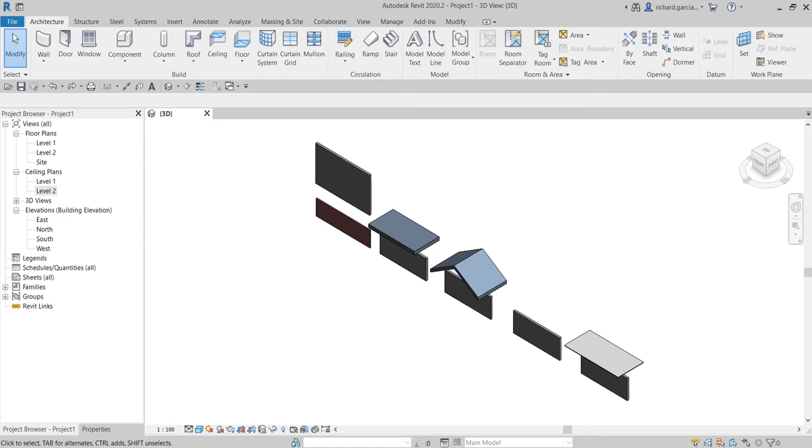Learning with Rich here. In this video, I'm going to teach you options on how to attach walls to other elements. As you can see here in my sample file, it's a very basic one. I just used the architectural template to create the project, and then I just created walls, and here I'm going to show you different options to attach your walls to another element.

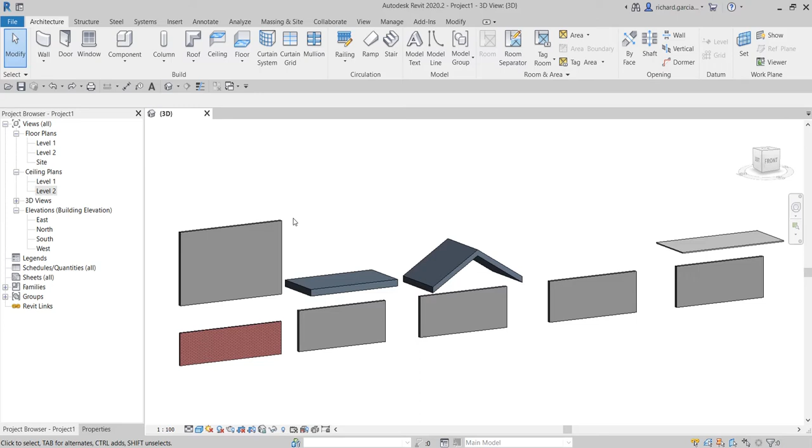In Revit, after placing a wall, you can override its initial top and base constraints by attaching its top or base to another element in the same vertical plane. We know that we can also adjust our walls by selecting them and changing the base constraint and the base offset. You can also change the top constraint and the top offset.

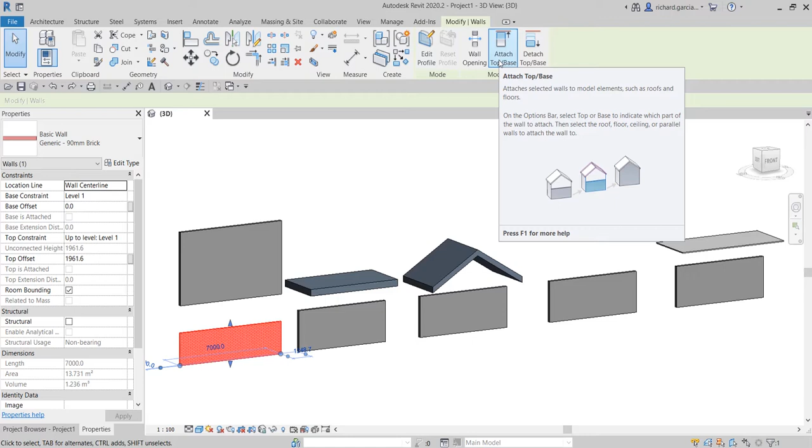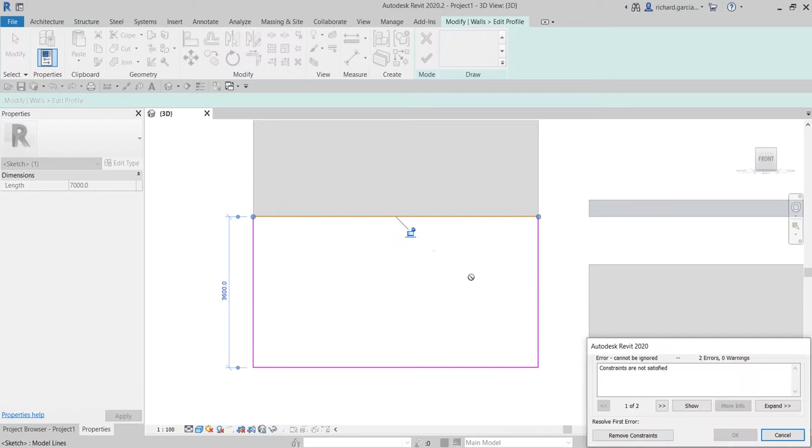But another way to attach your walls to other elements is by using this tool called Attach Top/Base. By attaching a wall to another element, you avoid the need to manually edit the wall profile when the design changes. When I say manually edit the wall profile, it's like this: I click this wall and select Edit Profile. You can do this if you want to modify your wall, for example to attach it there. Just remove the constraint and then check to finish.

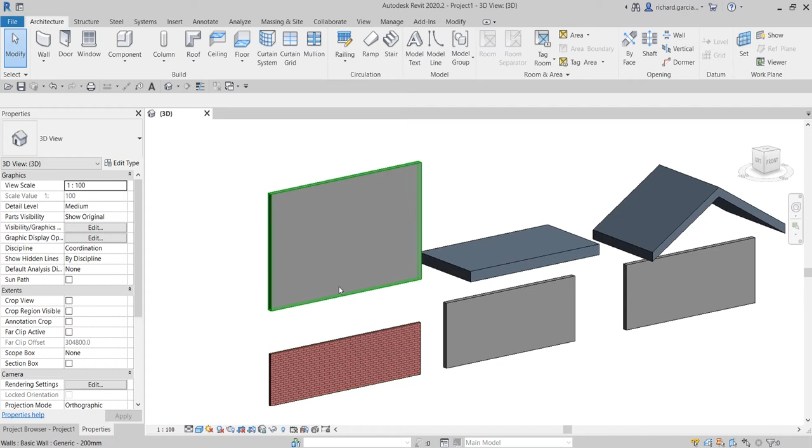But instead of doing that, I prefer using the Attach Top/Base option when attaching my walls to other elements. The other elements our wall can be attached to can be another wall that is directly above this wall. For example, I want to attach this to this wall, so you can do that. You can also use a floor. You can also use a roof.

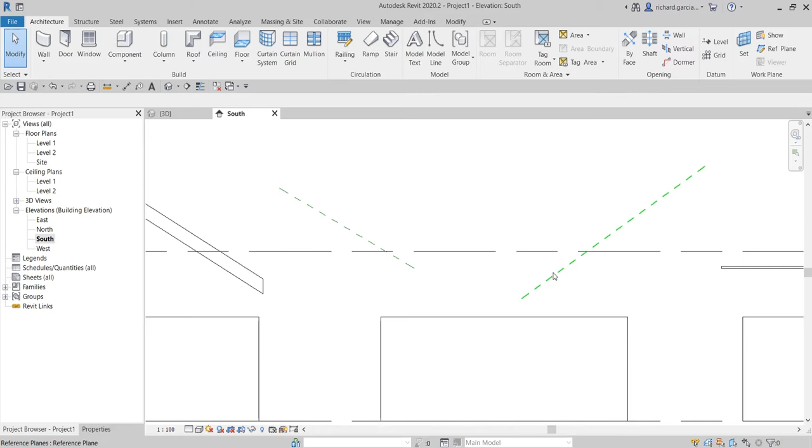And as you can see, there's nothing here, but if I go to my south elevation or any elevation, you can see that I have drawn a reference plane. You can also attach your walls to your reference plane. Or you can also attach your wall to your ceiling.

Just a recap. What are the elements that we can use to attach our walls to? First, you can use another wall that is directly above the wall that you want to attach. You can also use a floor, and you can also use a roof. You can also attach your walls to your reference plane, and you can also attach your walls to your ceiling.

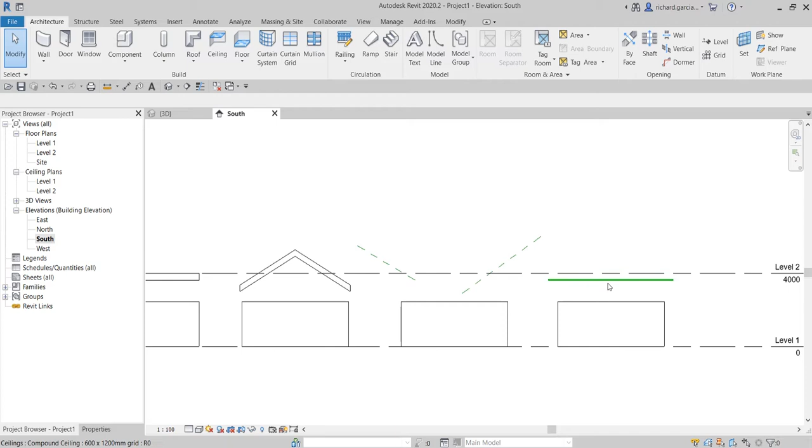All right, so let's try this one. I'm going to select these walls just to quickly show you, and then I'm going to select Attach Top/Base. I click that one, and then I'm going to click here. So there you have it, you are able to attach your wall.

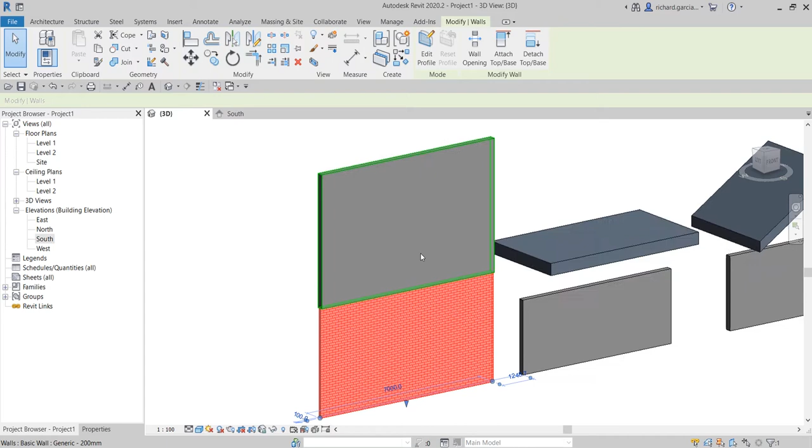What I'm going to do is split this wall. I'm going to use this tool here, Split Element. I'm going to split somewhere here, and somewhere here, and then Modify. Then I'm going to click this and stretch the top portion and then the bottom. You can see this one will also follow.

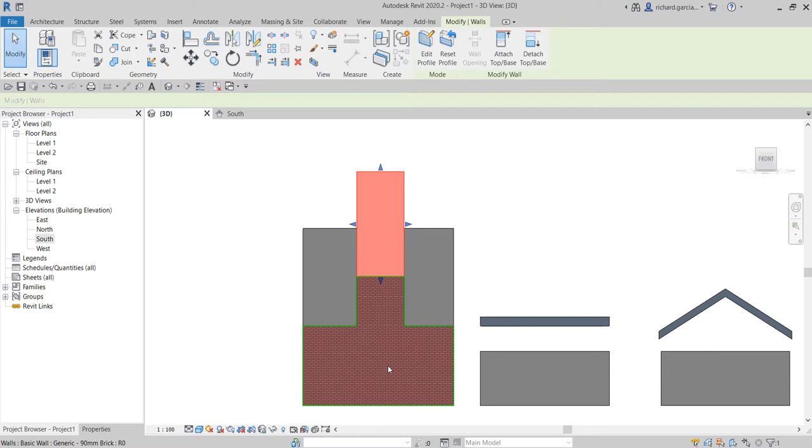I'm going to click this one. I'm going to move that, move that, and again you can see that our wall here follows. Every time I modify this one, since it is attached to that wall, it also follows, right?

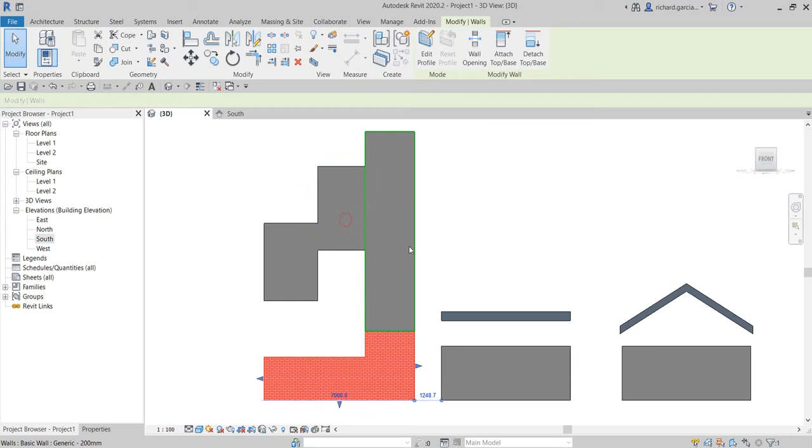Now, in case you want to detach your walls from the element you attached them to, like these walls here, all you have to do is select the wall again, and there's an option here, Detach Top/Base. I'm going to select that, and then pick this. As you can see, it will be detached. There you go.

Let me repeat. I'm just using the top portion here, but of course you can also attach to the base portion of the element. I'm going to select this, Attach Top/Base. Let's click this one, Attach Top/Base. Let's click. All right, so I think it's already attached.

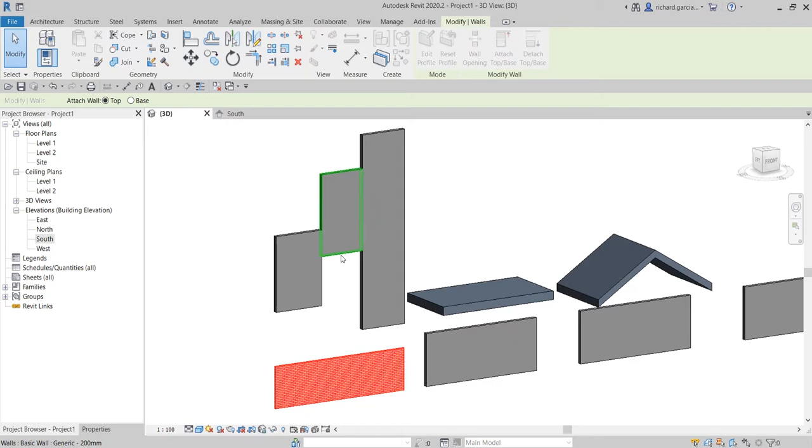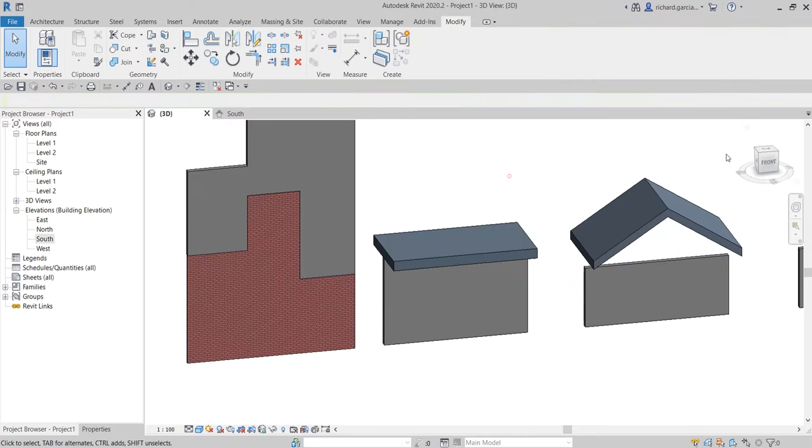Detach all. So just detach all first. So I select attach. Okay, attach. All right. There you go. Okay, so another element wherein we can attach our wall is our floor here. So I'm going to select the wall, attach top/base, and then let's select the floor here. There you go. Again, if we are going to move our floor here, the wall will follow as well, right?

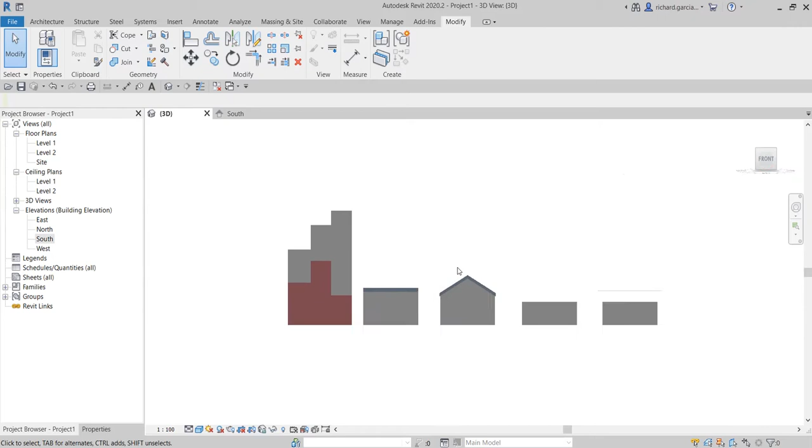Okay, and same with our roof here. So I'm going to click this, attach top/base. Let's click that one, and then let's click our roof. There you have it. So again, if I'm going to modify the roof, I'll adjust that. You will notice the wall will also follow.

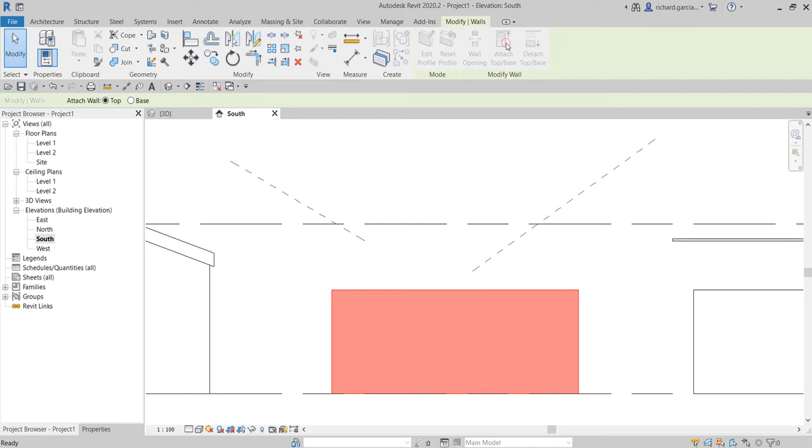Okay, and then I'm gonna go ahead and open the south elevation here, and then let me just quickly show you how to attach our wall to the reference plane, which is simple. Same procedure. You just select the wall, attach top/base, and then we can click that, and there you go. So this is infinite. Okay, so it goes all the way down there. Even if I have drawn my reference plane only up to this point, it continues to infinity.

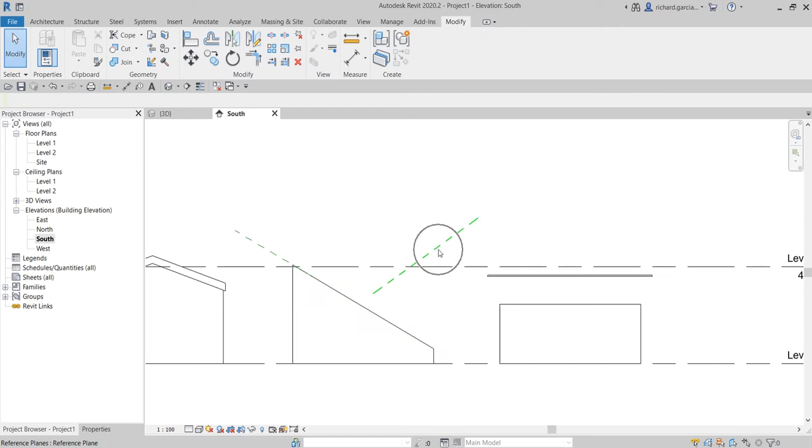All right. So if I'm gonna go ahead and attach that also here, what will happen is it will detach from your first reference plane and then it will attach here. So I select the wall, attach top/base, and then let me click this one, and that's what's going to happen. Okay, and then for the last one, we have the ceiling here.

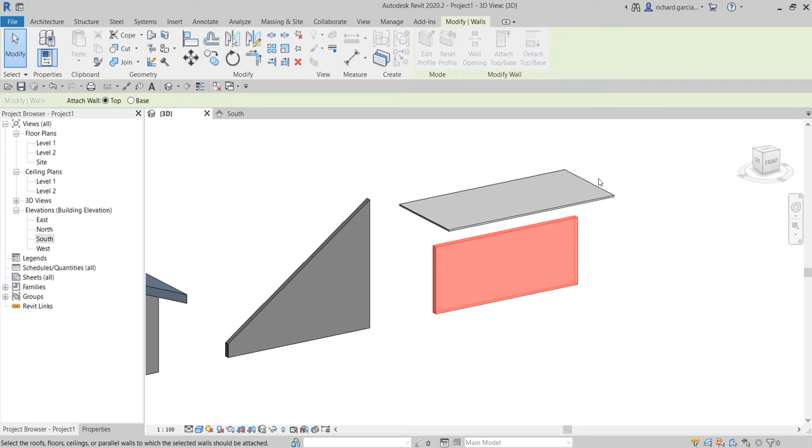So another element wherein we can attach our wall. So I select the wall, attach top/base, and then let's click the ceiling. Okay, so again, if I'm going to select the ceiling, you can adjust the ceiling and then the wall will follow as well. So if you want to modify or detach your wall from the ceiling, just click and then detach it from the ceiling, right?

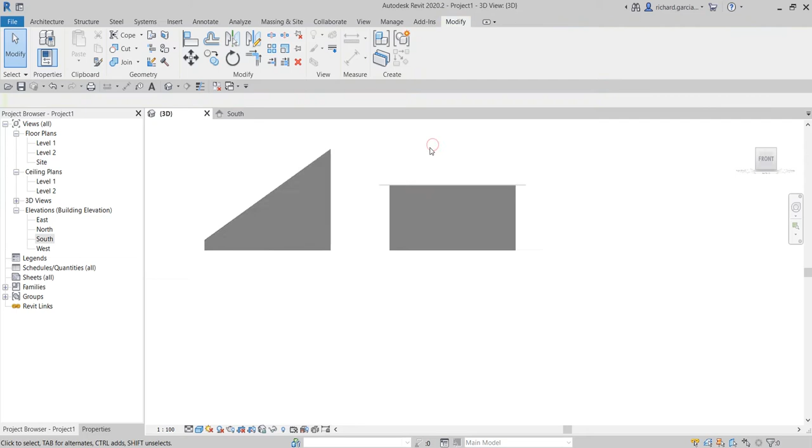Okay, so just a few guidelines when attaching walls. So first, you can attach wall tops to a non-vertical reference plane. So it should be horizontal, of course. And then you can attach walls to an in-place roof or floor. Okay, just like this one.

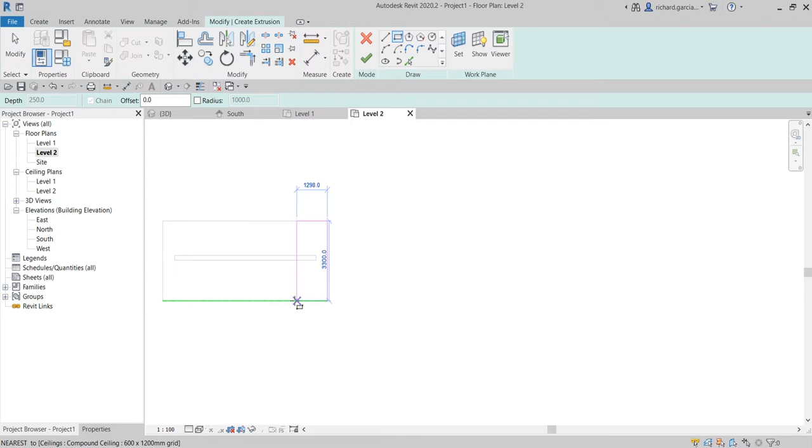I go to my level 2, and then I'm going to create here an in-place family. An in-place family that is a floor. So I select the floor. Okay, so I'll just create here an extrusion, just a rectangular one. Okay, just like this one. I'll just put it here. There you go. Just finish, finish. And then I'll just copy this wall here.

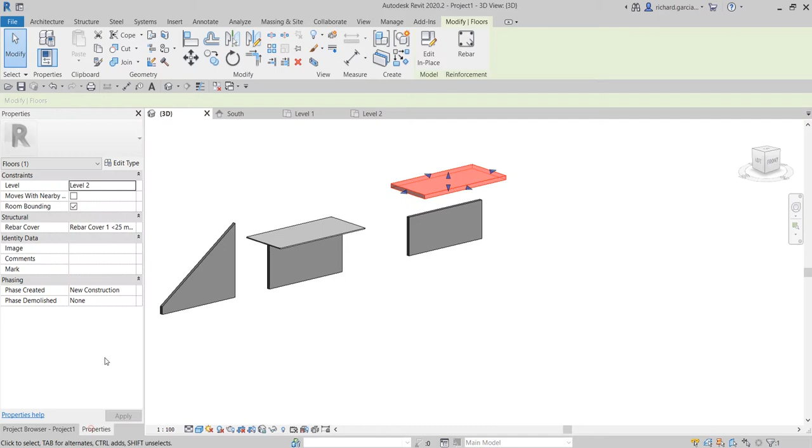Alright. So I go to the 3D view. So this is our in-place family. So if I select that one, that is an in-place family. You see there's an Edit In-Place, meaning this is an in-place family. So I select this one, the wall, and then let's attach it. So let's click. There you go. Okay, so it needs to be a floor in-place or roof in-place.

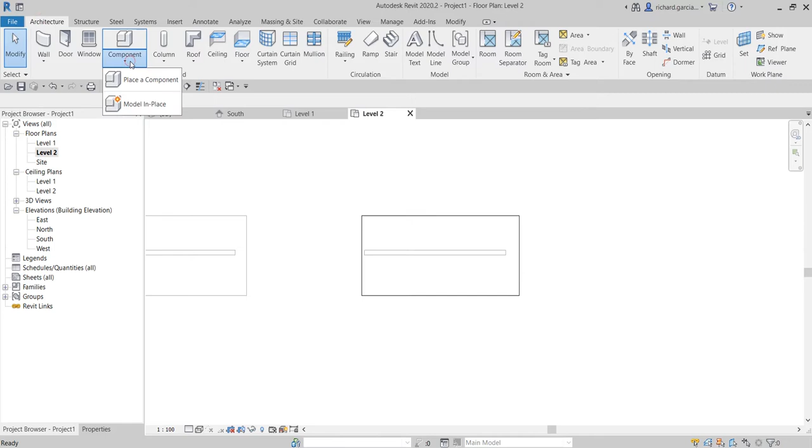So let me create a roof here. I go to Component, Model In-Place. So this time I'll create a roof category, roof. Okay, just a simple extrusion. So I create one here, just like that. Finish, finish, and then I copy the wall. Just copy that wall, put it here.

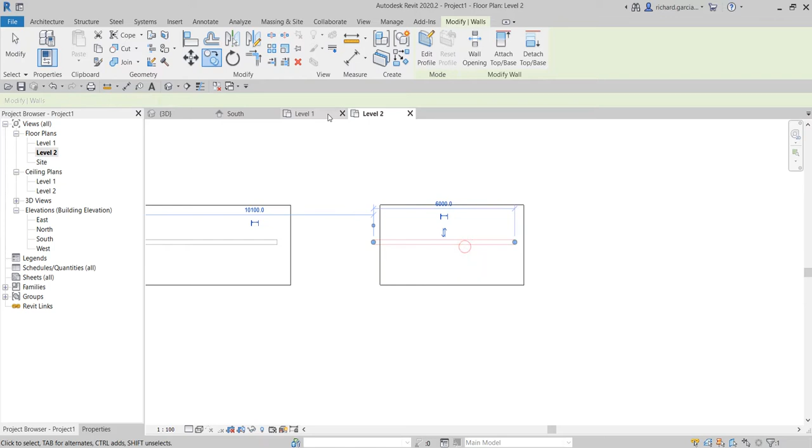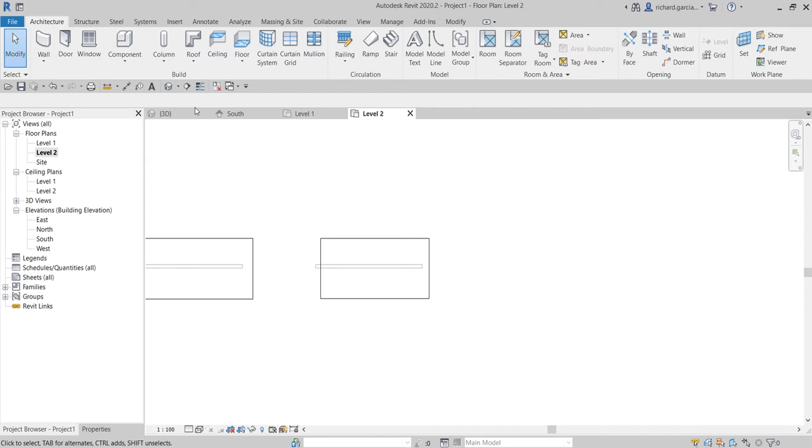Go to the 3D view just to show you. Click, attach top/base, and then attach to our roof there. Okay, there you have it. Okay, the other side didn't follow. So next, one thing that I need you to take note of as well is to make sure that you properly categorize your in-place family as a roof or floor.

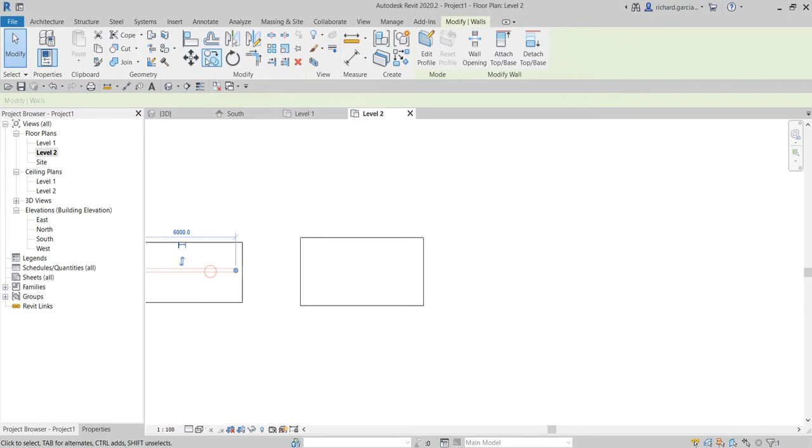Because if you are going to create, let's say, a generic model, so I select a generic model and then I select OK. I'll create an extrusion here, just like that. Check. So I select the wall, copy, put it here. So if I go to the 3D view, I attach this, select, attach top/base. As you can see, I can't select our in-place family that is a generic model. You see I can't click. So it should be a floor or roof in-place family.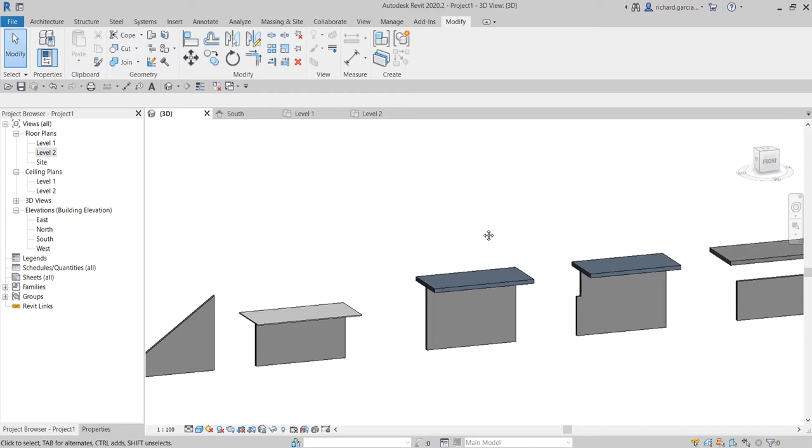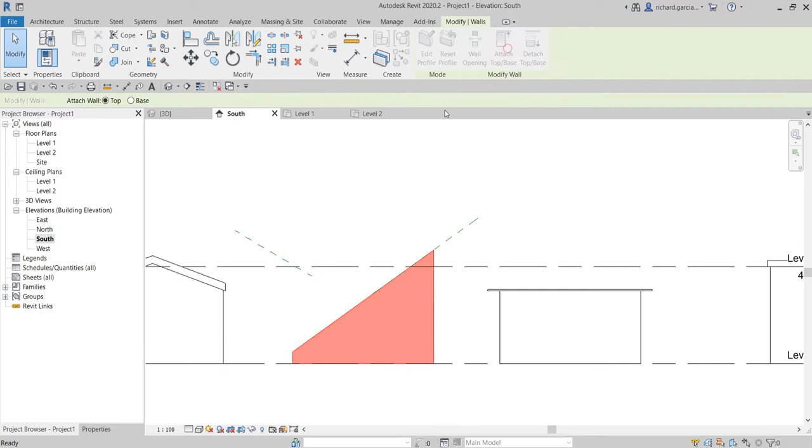Now another guideline that you need to understand is when attaching walls, if a wall's top is currently attached to a reference plane, just like what we have here, attaching the top to a second reference plane, for example, detaches it from the first reference plane, like what you have seen. So I select this one, attach top/base, I click it here, so it will detach from the first reference plane.

Okay, so another guideline that you need to know is that you can attach walls that are parallel in the same vertical plane that are directly above or below one another, just like what we have here. So we have walls and then we also have walls above. All right. So hope this one is clear.